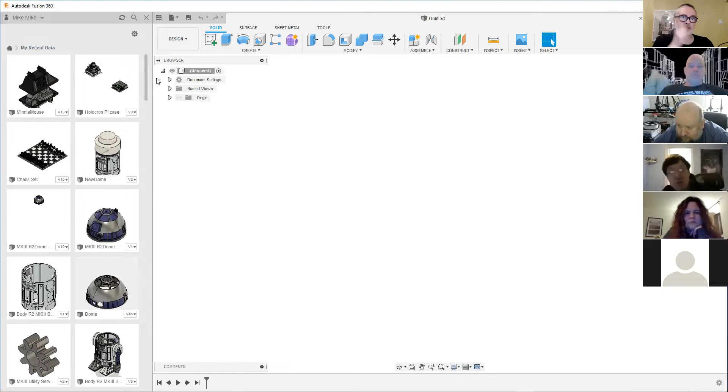And you can order this into folders. You can also back up and store your designs locally, so they're not got to be held on the cloud. I tend to back stuff up fairly regularly, obviously, with some of the intricate designs that you've got. The other great thing with Fusion is you start to build a portfolio of stuff that you've designed already. You can pretty much pick on these and go into them and edit and sort of change them.

The first thing I'll cover, and I cover this all the time, is I do what's called direct modeling. There are different statuses you can set Fusion into, and I do direct.

What I do is right click on document settings and select 'do not capture design history.' You know where the design history is, along the bottom you've got this little play symbol. I click off design history, and it tells me the timeline and all design history will be removed, and further operations will not be captured in the timeline. I hit continue and that disappears.

The reason I do that is that what Fusion does, if you leave the timeline on, is it records everything that you do. So you can go back a number of steps, change something, and then go forward. But to do that in the background, it very complicatedly links all of your objects and everything you're building. That means when you start to make changes, sometimes strange or unexpected things happen.

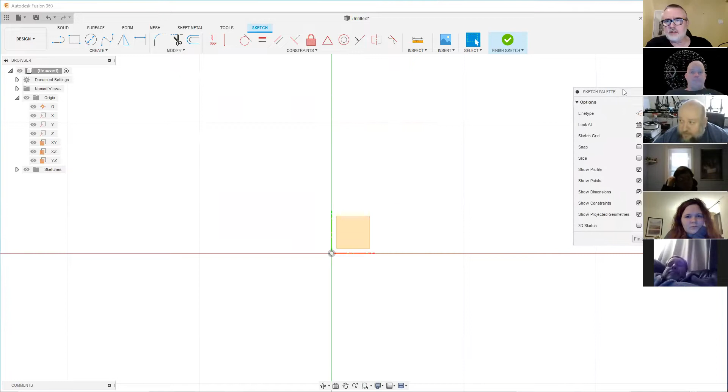What you'll see is all your tools across the top will change. You'll have a sketch palette that comes up, and your design stuff. Can you see a box called Sketch Palette? Yeah, you can. Cool, okay - just sometimes when you share windows, it doesn't give you all the windows that pop up, so I want to make sure you can see what I'm seeing.

So I'm going to go up to the solids here and click on a 2-point rectangle. What I'm going to do is drag that out, and as you can see, as I drag it, the numbers change. If you let go of your mouse, I can just type 20, tab, and type another 20, tab, press return.

What I've done is created a 20 by 20 millimeter sketch. It's a flat 2-dimensional object, so at this point it isn't actually a solid - it's what I call a sketch, and I'm still in sketch mode.

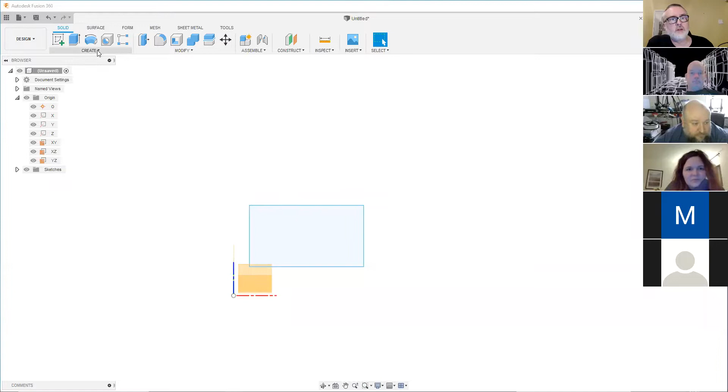So on the top menu, I can click Finish Sketch, and I'll go back into solid mode. In Fusion 360, if you drop down here, there's lots of different modes it can go into that dictate the particular mode you're in. Now I'm back into solid mode, and when you're in solid mode, this is where you create 3-dimensional objects.

So all we've got at the moment is a square we've created that's 20 by 20 millimeters. Because all of the peripheries are connected together, it's a continuous loop or continuous object. When I hover my mouse over it, you can see it changes color, which means I can select that particular square. If I click Create and Extrude, and type 20 into there and click OK, I've now created a 20 by 20 millimeter cube.

So if you then wanted to print that out on your printer, you can export that as an STL, and away you go. Now, a couple of things have happened in this browser bar on the left-hand side. You'll see that bodies have appeared and sketches have appeared, and these are two fundamental things we do with Fusion. We have sketches, which we've just drawn, and bodies, which are solid objects. If I wanted to print that, I could right-click on it and click Save as STL, then click OK, and it takes me to a browser window where I can save that as an STL file, which you can load straight into a slicer and print.

Does that make sense so far? Yeah, cool, good. Any questions at this point?

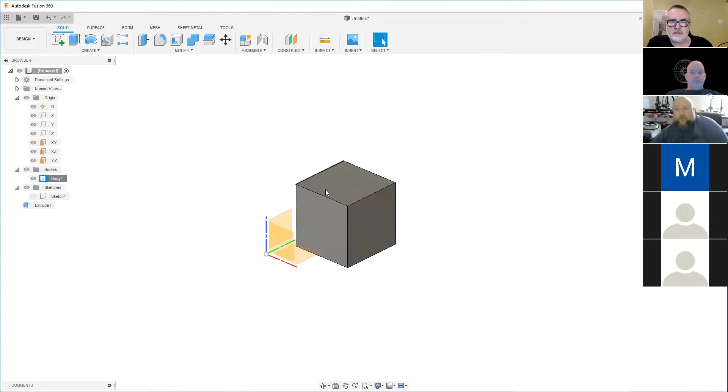How do you resize your browser window? Because it basically takes up half the screen now, and there is no drag bar or anything on it. How do I resize the browser window?

Yeah, the one on the left? Oh, this window? Yeah, as you start to create more and more complex objects and it gets longer and longer, you will have a scroll bar in there so you can go further down.

So as we start to create, let me show you what I mean, if I do something very quickly. Let's do 10... 20 of those. So now what I've done is I've got 20 objects, so you can see the browser bar's gone down, and I've got a little scroll bar at the side that lets me go up and down on there.

Delete that. Yeah, even though we've turned off the timeline, you can still use the undo and redo buttons, so it doesn't stop you undoing and going back and back. But when you save it and then reload it, it doesn't retain that undo memory.

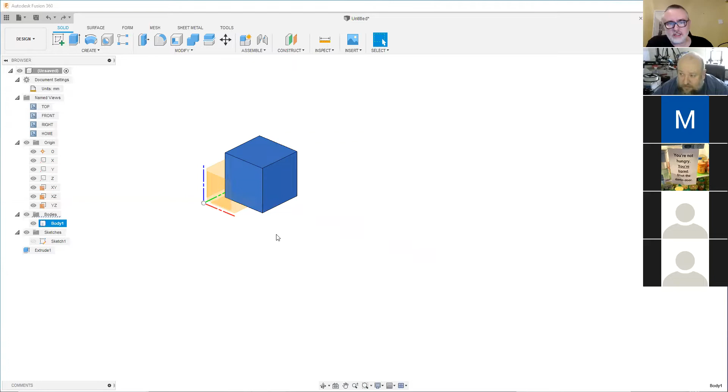Okay, so I just wanted to do that block to get the concepts of what the sketch was and what the bodies are. So sketch is 2-dimensional objects, bodies are actually the cubes. So what we'll do is I'll quickly show you how we use sketches and bodies together to do a bit more complex shapes, and what I'll do probably is we'll do a dome because that's familiar to all of us.

So if I hit the sketch button, always start with a sketch. What I'm going to start to do is select this plane here to draw a dome, and I'm just going to use a simple line command. I'm going to go from the center, and it'll all become apparent, but I'll do a 100mm high dome. And then the body of the R2, I'll make 100mm.

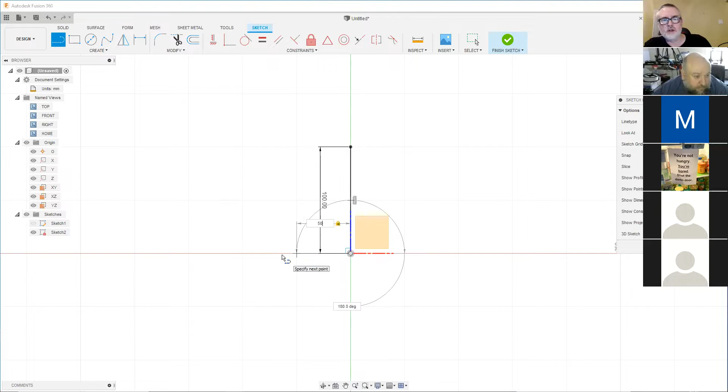So what I'm going to do is just do a line that's 50mm, and what we're actually going to do is sketch the profile of the dome, and then we're going to rotate it round to create something. Again, lots and lots of sketch tools: if we go in there, you can draw circles, triangles, arcs, splines. You've got a whole bunch of tools in there. I'm just going to quickly drag a spline.

What I'm going to do is draw a very strange shaped dome, something like that. So what I've done there is I've actually created a half profile of the dome that I'm going to create.

With all of these, you can go in and tweak some of the little points, tweak the angle of the shape you've done by dragging the dots around. If you start with Fusion 360, the best thing is to play around with some of the different tools and get a handle on how you can do sketches. Sketches are probably the most important thing. So I've created a sketch.

I'm in sketch mode as we said before, and now I'm going to click Finish Sketch. The next thing drops me into solid mode, so this is about creating bodies. Because I've got a full perimeter, it lets me select that. If I click Create, I've got a bunch of tools here - things where you can create boxes, cylinders, spheres, all sorts of things, which almost bypasses the sketch mode and just creates a solid object straight away. My preference is always to do a sketch first, and then from that create the body you want.

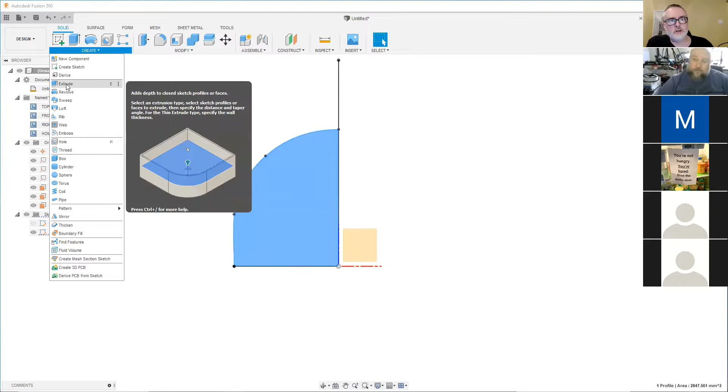So I've shown you extrude, which is how we did that 20 by 20mm block. What I'm going to show you now is something called revolve. What revolve does is take that profile we've got there and revolve it around a single line. So I'll click on revolve. It's asking which profile I want to select - I've got one selected. It's asking for the axis I want to select. I'm going to select that axis, and as soon as I've clicked on it, if I just drag that around, you can see it's created the dome. I'll click OK.

And there we go, we've got the start of a dome. That particular technique is brilliant, and it's incredibly easy to do all sorts of things. So if, for example, you wanted to do a greeble that was a power coupling rod or whatever you want to call it, you can draw yourself a straight line like that.

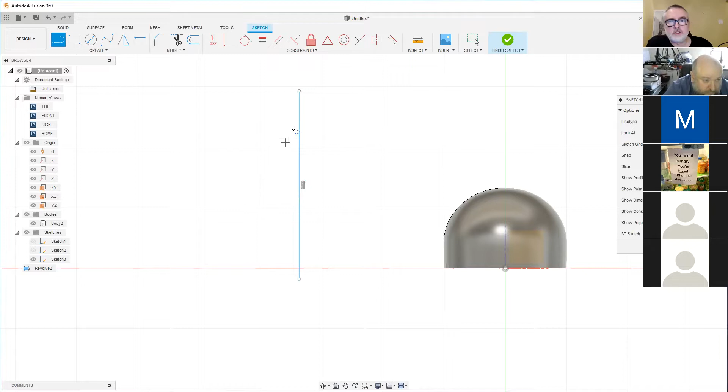Then what you can do is just draw it, play around in Bob Ross style - happy trees, draw some happy trees, exactly. There we go. Can you drop in type? You can indeed. I'll just finish this - may I interrupt for a split second?

Can you import an Illustrator vector? You can indeed, you can import DXF files, I think they are. If you click on insert, you've got SVG files and DXF files. Okay, perfect. So as you can see, what we've got there is the start of my greeble.

Then finish sketch, highlight the profile, create, revolve, hit that axis, click OK, and I've now got that.

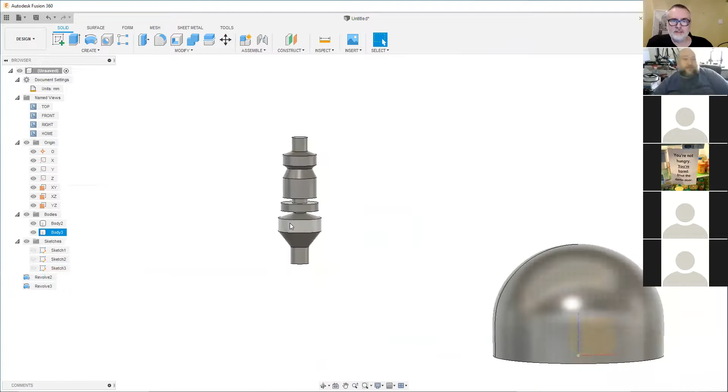Oh, that's nice, that's awesome, very cool. I'm giving all my secrets away. You'll just be able to fly off and go and do all this kind of stuff. Yeah, it's really kind of cool to do little things like that. There's loads of different tools that can do these sort of things, but you've just got to get used to the very basics first.

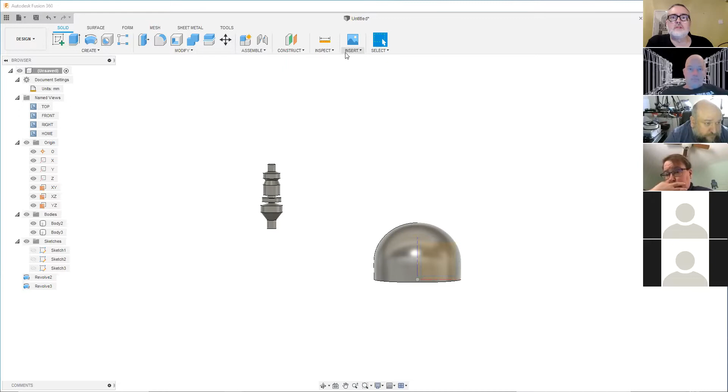What I'll show you as well is where you want to take the reference of something and start to create. Across this top there are lots of things you can do. We've covered some of the design ones, but you can insert all sorts of things. I can insert what's called a canvas. I'll click on insert canvas and it'll let me click on insert from my computer - I can browse for images.

Let's see what images we've got that we can pull in. Let's pull a chopper in like that. So I can choose an image like chopper, select a face, that image comes on, and what I've got now is a resizable backdrop picture I can use as a reference. This is actually a render of the chopper I designed, but it'll do. I can position this wherever I want and click OK.

What that's given me now is a reference point, though not necessarily the right scale. For example, the standard width of an R2D2 dome is 463 millimeters, so I don't know if this particular image is exactly the scale I want.

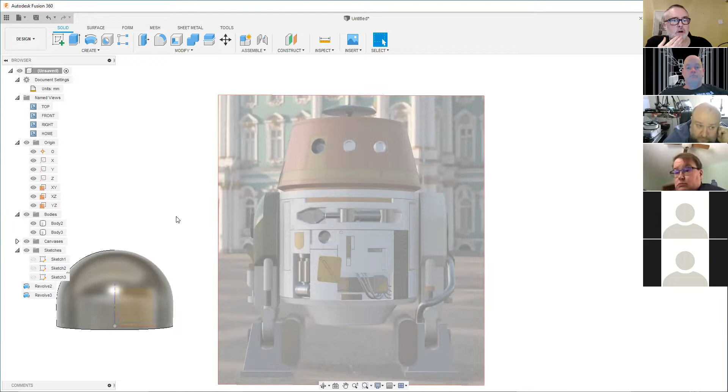Another thing you can do once you pull this in, as you can see it's flat on the axis, is go under Canvases, which is what I've just pulled in. That image is called Front. Click on that and I can edit the canvas, making it more solid or fading it so I can draw through it. I'll stick it about there.

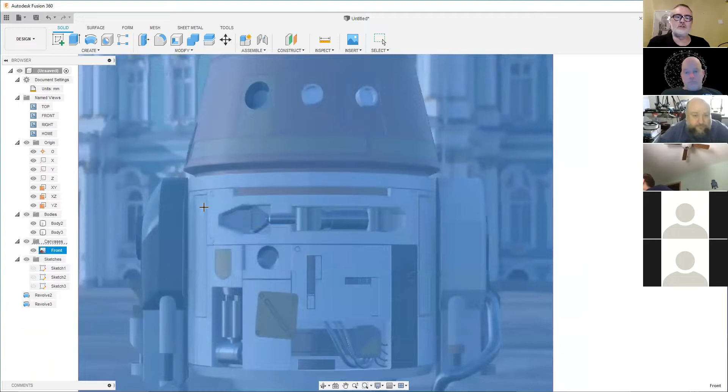Now a really useful thing on this canvas: if I right click and select Calibrate, I can resize the canvas. Remember, R2D2's dome is 463 millimeters. I can zoom right in and say from that point to that point - at the moment a little window comes up on the middle of the left-hand side showing 113 - but I want it to be 463, because that's how big R2D2 actually is.

I'm using chopper, but hey ho. Click OK, click return on that, and what it does is resize the image so that now if I draw a line from there to there, you can see that is 463 mil. So what it's actually done is sized that reference image at exactly the same scale. So if you're looking at a particular prop you want to create, first bring the image in as a reference, size it, and then you can start to draw it.

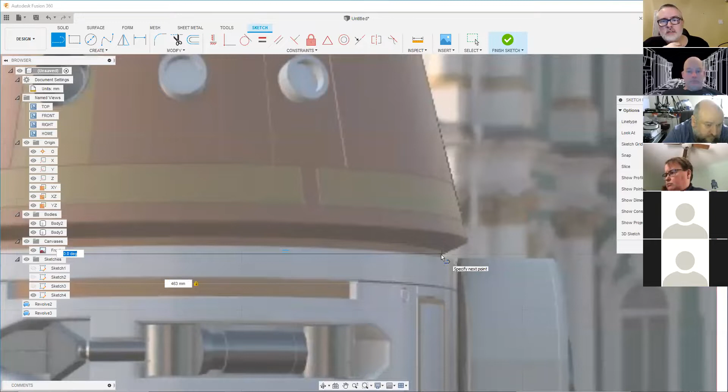And the way I draw Chopper's dome is I'd probably take a line from there to there, which is 463. There we go, done.

As I said, when I'm doing domes I'll tend to do them in profile. If I hover along that line, it'll freeze at some point with a little triangle - I don't know if you can see that on screen - but where it freezes, it's automatically found the center point of that line. So I'll do a center point straight up, click tick, and then you can just start to trace out the edges of that dome and get a perfect profile.

Now, of course, the picture we're looking at is a perspective picture and we're drawing in orthographic, meaning we're drawing flat. So you've got to take that into account when you start to build these things, but it gives you a really good point of reference.

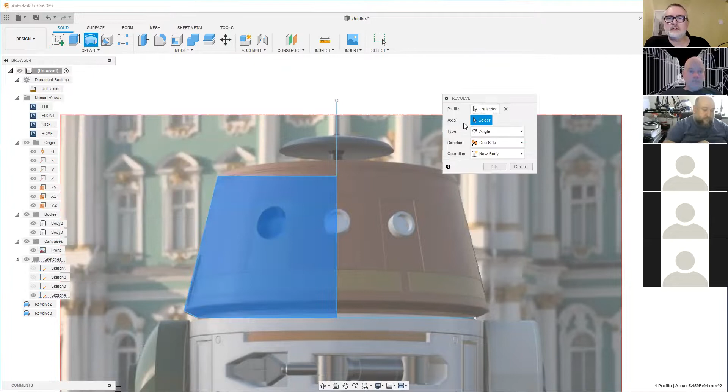So I'm going to pull that back flat to there, and what I've got is a pretty accurate profile of a chopper dome. Then exactly as before, I do Create, finish the sketch, get into solid mode, Create, Revolve - oops - Create Revolve, select that middle bit as an axis, click OK, and there we go, we've got chopper.

And if I tilt it up a little bit, you can see it starts to follow the lines of the actual image we've got. I can actually flick it from orthographic to perspective. I'll just see if we can get that near enough spot on - there we go. So you can see what you're actually doing is first sketching what you think it is, then if you turn the canvas or the bodies off and on, you can start to see how accurate you are in the way you've created it.

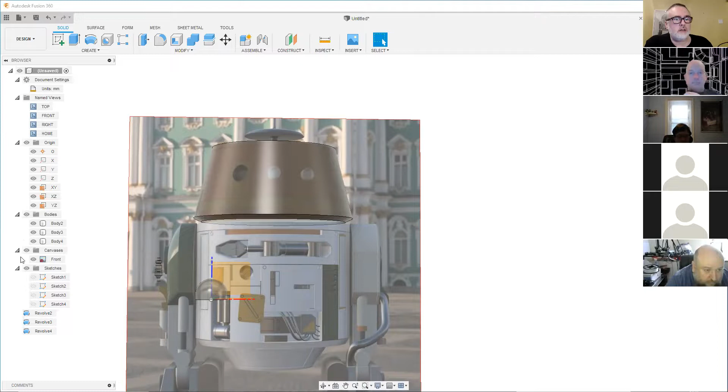So I've created a chopper dome. Let me put it back into orthographic mode just so I can see what I'm doing. I've created a chopper dome.

The next thing I'll do is hollow that out. To hollow something out, I select the face I want to hollow from, which is this bottom piece. When you're selecting faces, they have to be perfectly flat—if you're trying to hollow out a curved surface, it will be very difficult. I'm going to select that bottom one.

I'm going to click on modify, and there's something there called shell. What shell does is it lets you take a solid object and hollow it out, and I can choose how thick I want that wall to be. In this case I'm going to do 6 mil, which is typically what I use, but obviously you can use whatever you want.

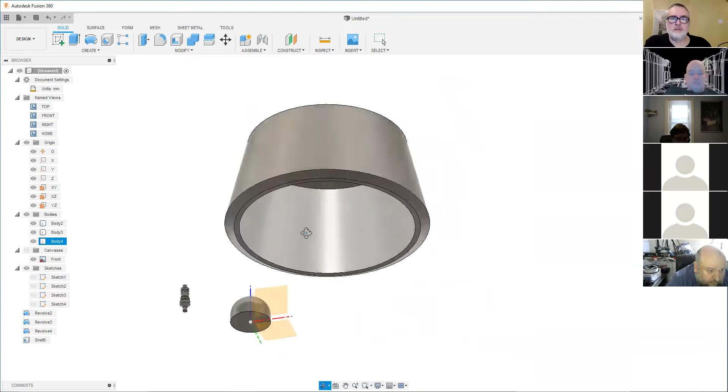Click OK, and now you've got the hollowed out dome, which is your basic shape. The way hollow works is it looks at the outer perimeter and tries to pull back by 6 millimeters. One of the gotchas is if you do loads of carving on the outside to put all the detail in, and then try to hollow it out, it'll attempt to follow all the details on the outside when hollowing, which generally means you'll get an error.

If that happens, you've got a couple of options. The cheating option that I tend to do—I'll talk you through it. So it won't allow me to hollow it out.

So what do I do? I draw a line on the bottom—just a quick line like that—and it'll all become apparent why I'm doing this. Then I'm going to cut this object in half using that line. This is a technique you'd use if, for example, you wanted to chop larger parts into smaller parts.

So I click on modify, and this time I'm going to do something called split body. What split body does is it takes the body that's there and uses a line to slice it. Select the body, there we go. Select the splitting tool, that one, click OK. And what I've got now is two halves of a body, if that makes sense.

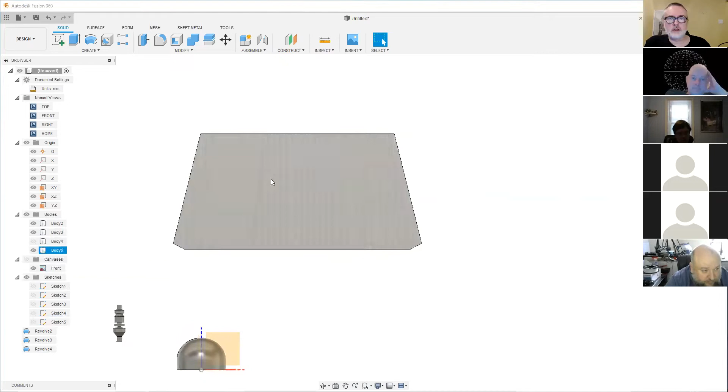Once I've got two halves, I'll move a little quicker so you'll see what I'm trying to do when hollowing it out. Now I've got a flat half that I can draw on, so I'm going to go into sketch mode and draw onto this flat half, doing exactly the same as before.

Then I'm going to use something called create project, which lets me sketch out an object that's already there. I'll sketch this as the object, and I'll show you why that's important, because I'm then going to use modify offset, which lets me take an object and start to offset it. So I've sketched the outside of that, and I'm just going to pull it back by 6 mil.

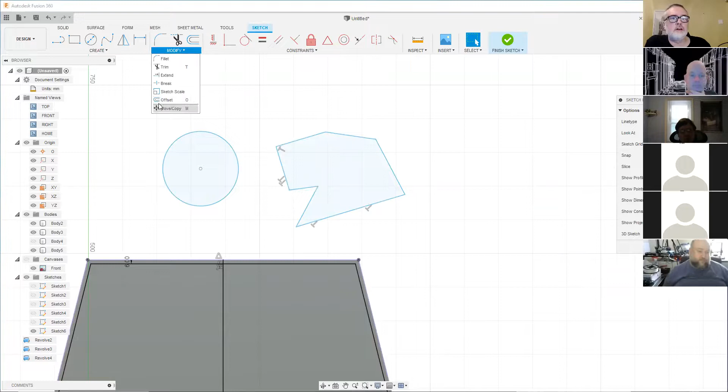And then what that's given me... So Michael asks, is that offset based on the projection? Yes—all an offset does is, if you've got any sketch, say like that, what offset does if you go modify offset and select a full circle, it lets you do a second drawing that's an offset of that sketch. If I do modify offset on this one, it'll let me do that.

My question really was, did you have to do the projection first and then put the offset on the projection? You did, because of what we'd got previously. Oh, because that's just a slice, isn't it, not the actual body. That's right, I get it. Yeah, it's the actual body, not a sketch—offset is a sketch tool. Does that make sense?

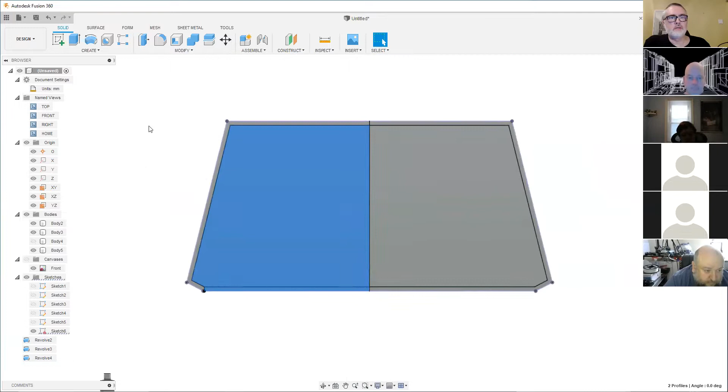So what that's given me now is that same 6mm shell, except it's sealed at the bottom. I can just draw a line like that. Then I'm going to finish the sketch, select this one, and also select this little bottom bit here. I'm going to do exactly what I did before, which is create a revolve around the axis on there. So what I've created this time is...

...kind of a chopper's shell that is 6mm in from each of the different edges. I'm going to create that as a new body. I could create it as cut, because what cut does is it combines the new body with the bodies that it can actually see. So if I bring that other body into play, what I've done here is I've created a body inside that's 6mm in from the outside of the skin, and by combining the two under cut mode, it'll remove the material that's on the inside like that.

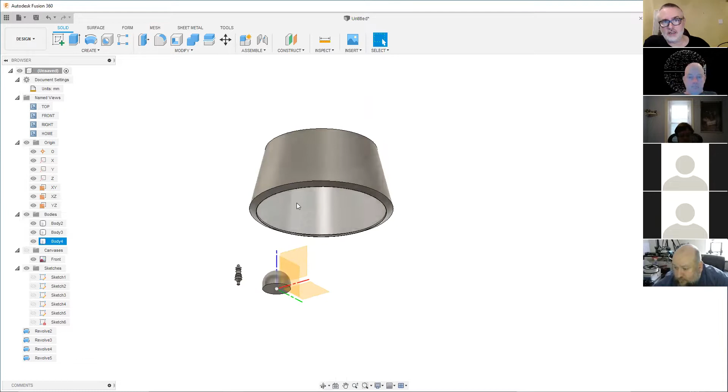That makes sense? And then all I really need to do is modify, combine, get my glue out and stick those two together again, and I'm back in that same position. So what I'm saying is you can use the shell command to make the hole, to create the shell. But if the shell command doesn't work, what you tend to do is make a body that's a little bit smaller that sits on the inside, and then you can combine cut, and it'll give you a little bit of a hollow shape.

I guess for a typical process, do you tend to try and do all your more intricate designs after you've done your hollowing out, to kind of avoid problems like this?

I do. I also very often forget, so I tend to do both. But my preference, I guess, is to hollow it out first and then start doing the modeling afterwards, because then you know that you're working with the skin.

Okay, so once you've got the basic body, that's when you can start to add more and more details. There's a few tools, and they're all quite similar. I mean, you saw how we created this little greeble here. So that's where you can start to add different layers of complexity and detail.

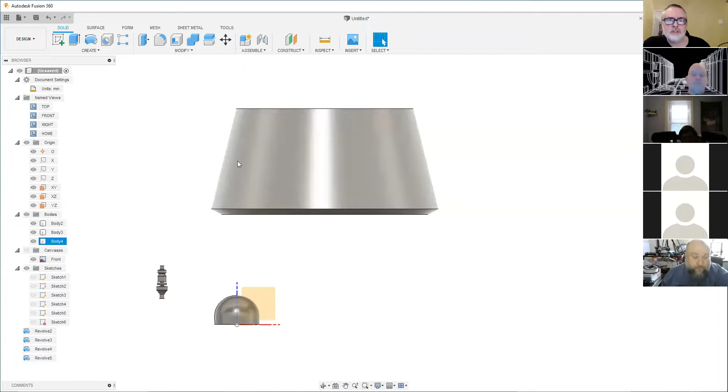There's no quick and easy way of working on curved surfaces or dome surfaces. There is a tool they've started to do now that allows you to project onto them, but it doesn't always give you accurate results, particularly for panels. So if I was starting to do panels on these, what I tend to do is end up sketching and cutting things. I'll show you what I mean by that.

So if, for example, I wanted to do some ring work on here, to create one of these as a ring, I'll just show you what I would do. First of all, I'd go into sketch mode, select this plane here, and I'm just going to draw some lines. The lines are going to be where I actually want the rings on the dome. So I'm going to draw that across there.

I'm going to move it up 1.54 mil, which is typically the thickness of things like the R2D2 lines and panels. So I'm going to do... oops, I didn't want it at an angle, delete that. There we go. So what I've done here is a little bit of a U shape, if you can see. And the reason I've done that U shape is I'm going to use it to cut this body. Again, if you think of it like wood, it's generally chopping things together and then gluing things up.

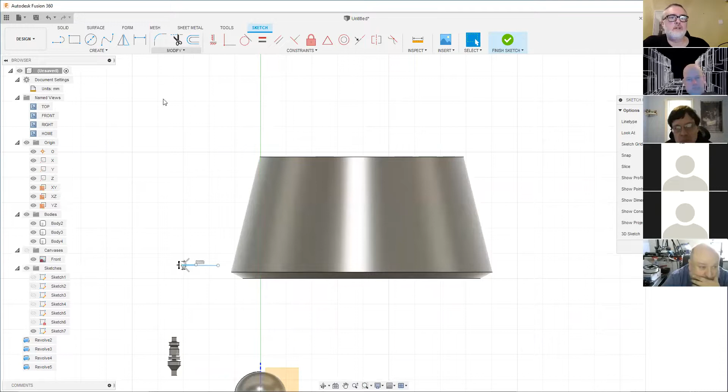So I'm going to click modify - I'm going to come out of sketch mode, sorry. I'm going to click modify, split body. And then when it asks me to split the body, it's asking me which body I want to split - this one. The tool I'm going to use is this one, the splitting tool. The reason it's got that U shape is it actually does both lines for me at once, so what it's actually going to do is cut twice.

So if I click OK, what I've actually got now is this bottom piece, this top piece, and then a very thin piece in the middle - 3 separate bodies.

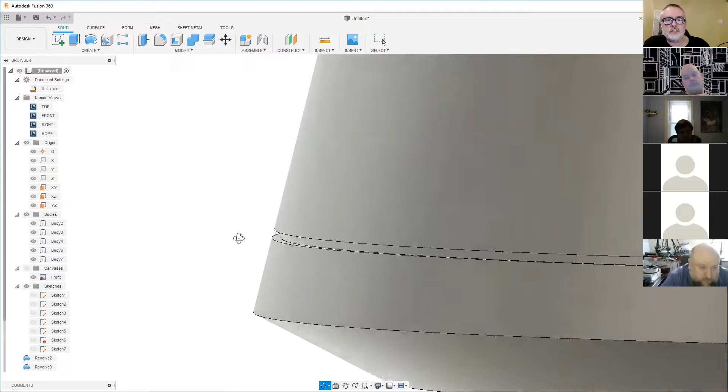But what that lets me do then is come into here, zoom in, and what I can do to create that groove that I want, if I put minus 1.54, I'm going to pull that one in a little bit. So there's a tool I use a lot called press and pull. What press and pull does, if I zoom out, is let you take a specific face and pull that particular face in and out, if that makes sense. So I'm using that to add the detail, minus 1.54. Click OK, and now I've got a slice with a panel detail in the actual dome.

And then all I need to do is modify and combine the three parts together, that part and that part. Click OK, and what I've got then is a panel on, this little ring on the bottom. The inside is still perfectly smooth because I've not moved the panels on the inside, but the outside has got this little panel mark. Does that make sense? Yes. Cool.

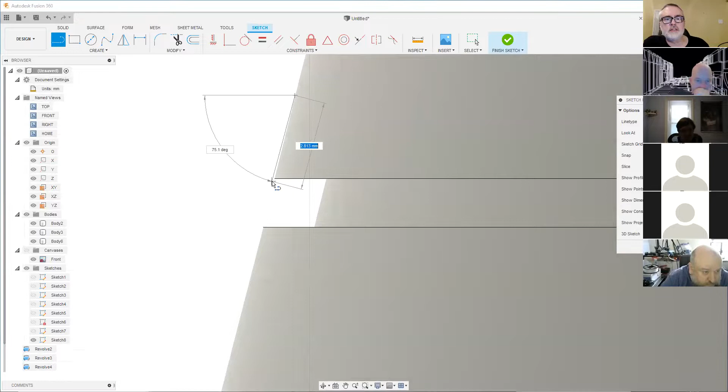Now, the challenge with this, if you're a perfectionist, is that this cut is straight across. What it probably should be like, I'll just quickly get something to show what I mean, is because the dome's at this angle here, you'd ideally want that cut at 90 degrees, if that makes sense, so you'd have a cut like that instead.

Michael, a quick question. Yep. Do you prefer to do it that way rather than putting it on the sketch when you create the initial rotational sketch? You can do it either way, Paul.

But the reason I tend to do these afterwards is it's not very often that you have a detail that goes all the way around. So with panels, like R2D2 panels, I'll use these to do the top and the bottom of the panel, and then do some vertical cuts to pull those in, so I'm not pulling in a full ring. If I was doing the base R2 rings, absolutely I would do it on the sketch, if that makes sense, Paul, but on this, it's when I start to add details.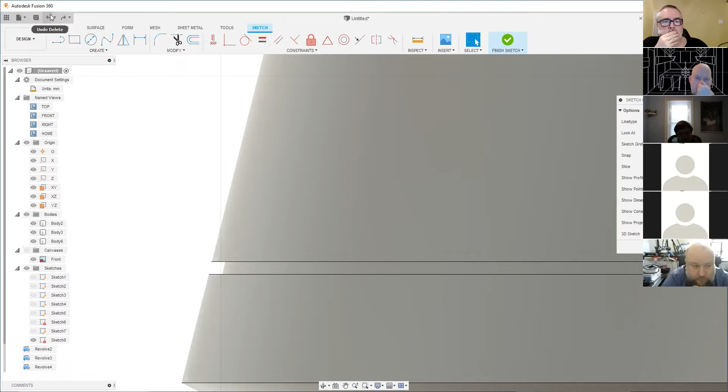I understand it's as much a personal preference and what you're used to, but I'm using FreeCAD at the moment, and I'm just trying to see how I would do that in FreeCAD. I think at the moment, with my limited knowledge, I'd have to do it with the sketch. I'll have to investigate how I might do what you've just done.

Yeah, you can. If you know exactly where everything's going to go beforehand, you can draw the lines in, out, in, out, in, out. The other disadvantage to that, Paul, is when I said before about the shell, it makes it very difficult to shell if you put all those details in the first instance, because it's trying to do a 6mm shell where you've got 1.4mm things on the inside, and shell gets a bit confused when you've got more detail on the outside. But you could also put your shell on the rotational when you do your rotational.

Yes, you can. Okay, so I just wondered if that was your preferred way of doing it, that was really my question. Yeah, it is, it is. I think I tend to work by blocking out the basic shapes and then starting to go into the different levels of detail.

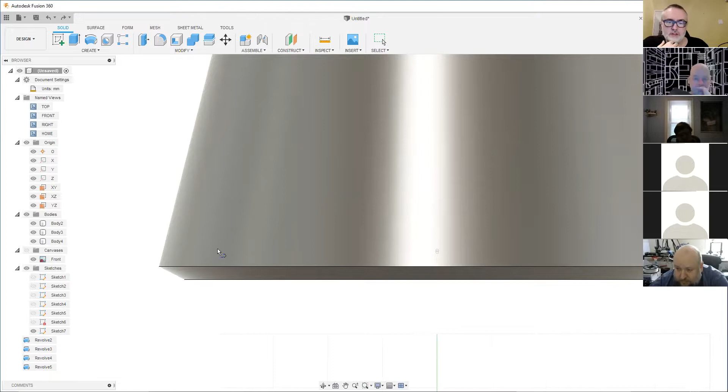I think when I'm working on very complex R2D2 domes, I prefer to do that because I get all the outlines done first, I can check the shapes are right, and then I can start to dig in and add the panels. But you're absolutely right, you can start to do that beforehand, sketching the panels in. The challenge you've got when you do that is if it's not a full ring, if it's just a groove that sits on the other side of a panel, it gets a little bit more complex.

So there's other ways of actually creating those cuts at angles, which I'll quickly touch on. I'm just going to go into line mode again, and create a project. There's 2 different uses of project, which I always find confusing.

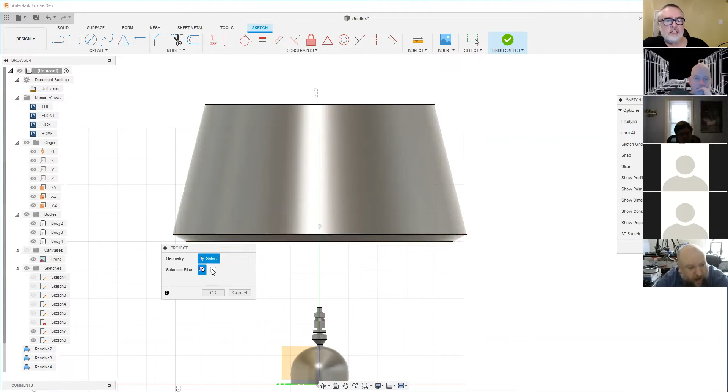There's specific entities and then there's whole bodies. When you do whole bodies, it just does the outline of what you select, irrespective of whether it's got bits going in and out. If you select entities, you'll select a panel - for example, this entity, you can see the two lines in red, the top and bottom line, and I can select this bottom panel separately. If I select the body, I'm selecting the whole thing and it'll just do that as an outline.

So as Steve said before, what I've done there is create a sketch, which you can see, that's in the same shape as the body. And if I just draw a line down the middle of that, we can work in profile. But if I want to start cutting those panels out, I can create what's like a cutting tool, which I'll show you what I mean by.

So if I draw a line from here at 90 degrees - the good thing with Fusion in sketching is once it knows the line you're coming off, it'll automatically lock to 90 degrees, so it's not all guesswork. There we go, 90 degrees. And then I'm just going to continue that line on, and if I touch this line here and go the other side, it'll continue that line. I'll show you why I'm doing this in a second.

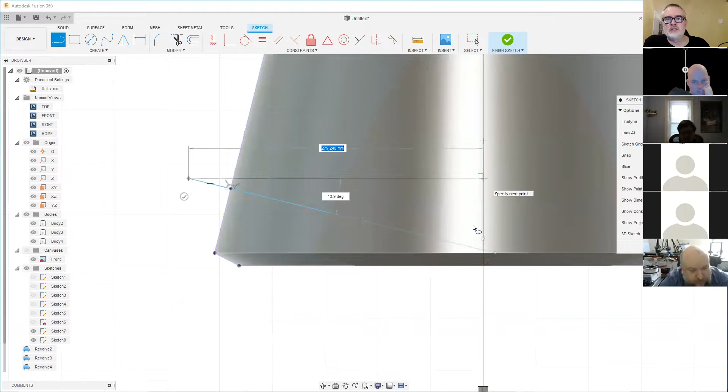So what I've created there is a triangle. And the reason I'm doing that triangle - take the bodies, exit sketch mode - is I'm just going to create a weird little tool. Create, revolve - this is exactly the same as what I did before. Flip the bodies off. So what I've got now, as you can see, is this disc, which has got the right angle.

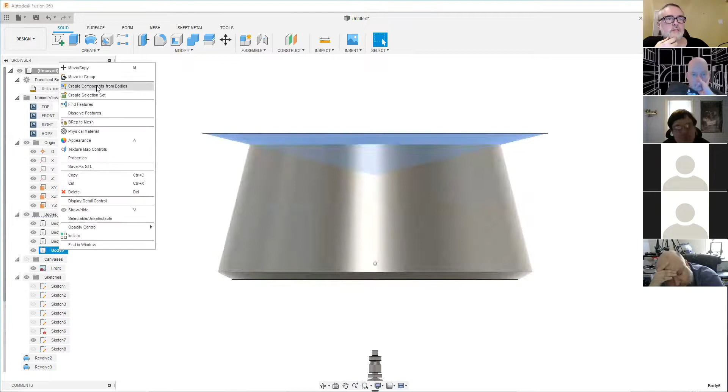Now, unfortunately, when I did that, it wasn't along the same center path as the main dome. So I'm just going to pull that in with what's called an align, pull that exactly central. There we go. So that disc is now at 90-degree angles to the main body. So what I can do, just move that down a little bit. There we go - I can use this disc as a cutting tool.

So I want to put a line there. And what I do is modify, split body, again. Instead of a line tool, I'm just going to select this very lower edge of that disc as the cutting tool, and click OK. And then what I can do - if I remove that, it's created a cut, but it's created a cut at the right angle.

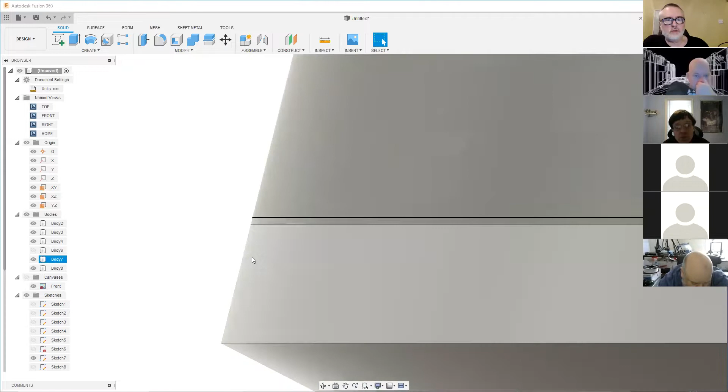So what I'm going to do is move that cutting tool up a little bit - I'll move it up 1.54 mil. There we go. And then modify, split body, highlight that piece again, select the bottom part of that cutting tool, click OK, and hide the cutting tool. So it's created similar to what we did before - a top part, a bottom part, and this part. But this part is now at the right angle for the actual dome, which means when I grab it and press-pull minus 1.54, it's done that at the right kind of angle - that's what you'd expect.

How did you create the right angle? Like, how do you know? When I pull back the sketch - the way I created the right angle is I sketched out the outline of the dome in the first instance. And then I just drew a line that was at 90 degrees to this angle. Okay, I get it now. You get it? Yeah.

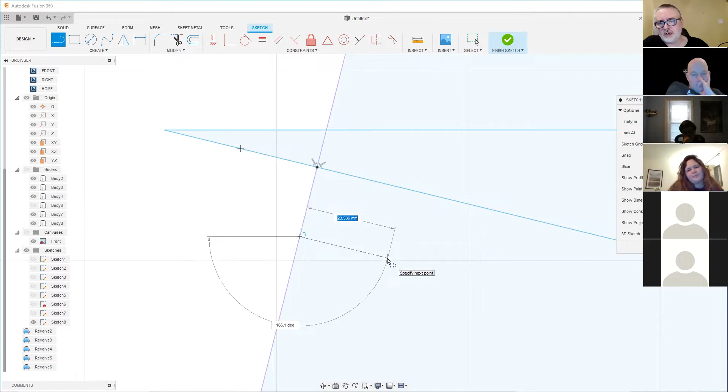So normally you can just do straight lines like that, and it works okay. The problem you've got with things like R2D2 domes is as it gets more towards the top, as it starts to curve, that just doesn't work because it looks awful. So you can actually get these at the right kind of angle - it's just a bit more of a faff having to create a cutting tool to do it. There's no easy way of putting all the details on things like domes, but you tend to get quite quick at repeating these things.

So, and instead I'll just pull that back a sec.

If I wanted to then do a panel, or not a circle all the way around, what you would then do is start to split these pieces up. I'll show you what I mean. I'm going to do it quickly, but you'll hopefully get to see what we're doing. I'm just going to move the cutting tool up a little bit to somewhere where we're going to do a panel.

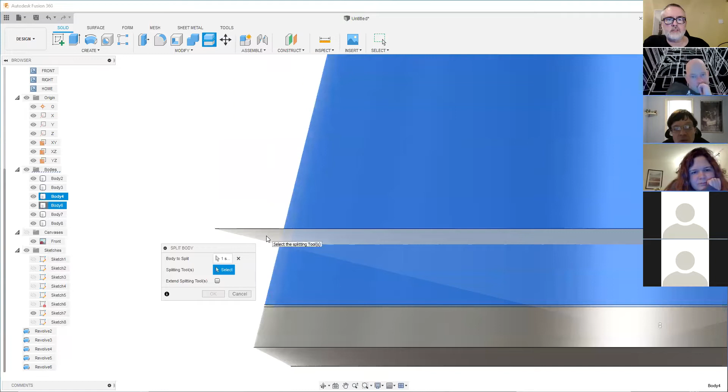Modify, split body, that top piece, and then select that inner face again. So split, make another split. I'm going to move this tool up again, another 1.54 mil, like that. And then modify split body, this top one, like that. So what I've got now is two pieces, with a bit in between.

If I wanted to do a panel, what I then start to do is some lines on top as to where I want those panels to go. I'll do it very quickly. I might want a panel that's say this big, and then I'm going to sketch, modify, split body, and this time I'm going to split this one, all three of these, like that.

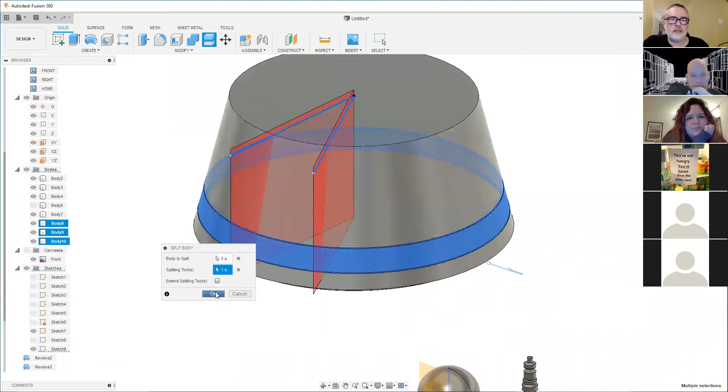I'm going to select this to cut it and this to cut it, click OK. And what that's done now is giving me, and you'll see more and more bodies are appearing, so I'm getting more and more kind of objects. So what I've done here is I've got something now that I can start to pull in.

If I was doing one panel, minus 1.54, I can pull, you can see there, but that's pulling a whole recess into that dome. If I wanted to just do a panel, what I could do then is pull that sketch back up that I had at the top.

There it is. Again, I'll just do this quite quickly. So just doing the horizontal lines, the other cut that I'll need to do this panel. Normally you would obviously measure these out, but I'm just kind of doing it roughly to show you the concept. Finish sketch.

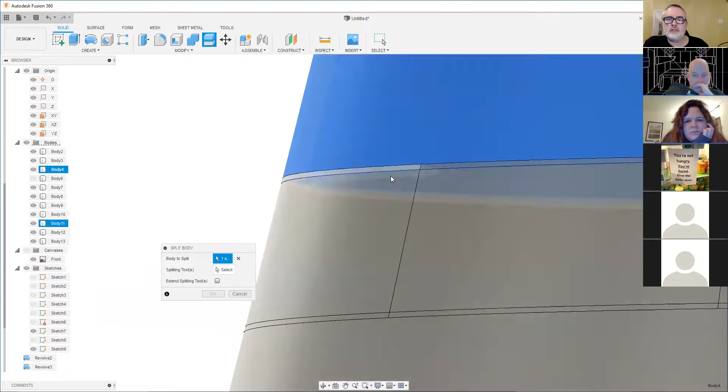There we go. And then modify split body. So I'm just going to do the outside of that panel now by splitting this body, and this body. There we go, with the outer line of that. So here's that one. Okay. And then modify split body, and I'll do the same. I'll just do that. Okay.

So what that's given us now is lots of different parts. So what I can do is select that face, that face, that face - I'm pressing the shift key to do multi-selects - that face, that face, that face, that face, that face. So what I'm doing now is just drawing around the outside of that panel. And I'm just going to pull that back, minus 1.54. Click OK. What that's done, if you can see, it's given us a recessed panel.

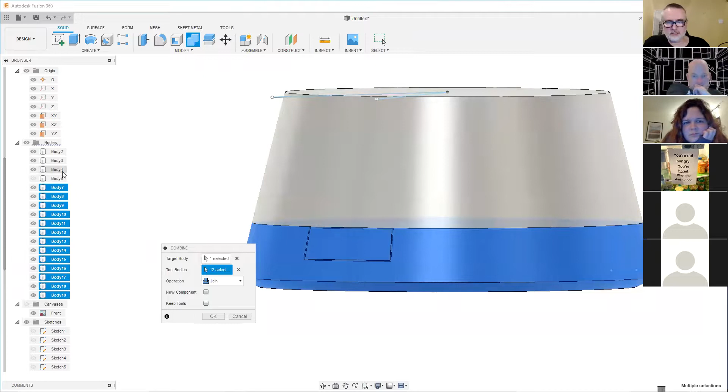And then finally, if you do modify and combine, get the glue out, and what you do then is glue all of this back together. Click OK. Once it's glued together as a single body, which this is, so that's your dome as a single body, what we've done there is created a panel on that particular dome. If that makes sense? Yeah.

Cool. Right, I know we've gone through a bit. Any questions? Yeah, how would you measure 1.54 for that, so that you've got the right measure for the recess when you create those lines at the top of the dome? On the top of the dome.

Yeah. So to do it accurately, what I would do is go into draw mode, and at the point where I can see that cut, I could click on there, click on 1.54. So I know that it should actually be about there. And that's now a reference point. And then what I would do is zoom right out again and draw a line from the center and just lock it onto that point that I've just created there. So I could do it that way.

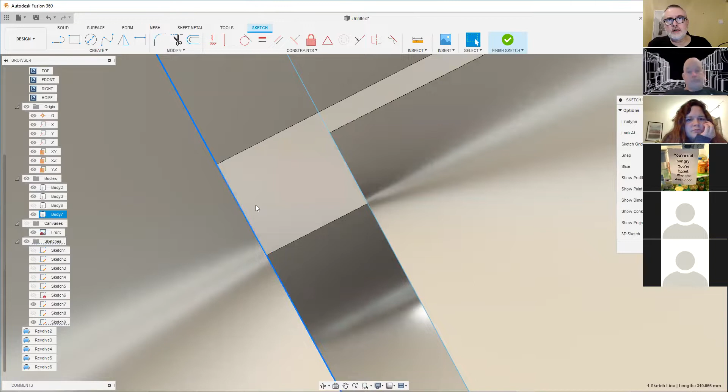The other way that you can do it, but it's not one that comes directly from the center, is I could use modify offset. I could highlight that and just do 1.54 on there. So what it's done is it's took that line as a reference line and offset it 1.54. The reason I say that's in my eyes, I probably wouldn't do that, because what it's doing is drawing the line that's not from the center then, because you've offset the whole line.

Realistically, on a printed dome, you wouldn't be able to tell a difference. But there's different ways of actually being able to do that.

Michael, do you parameterize your sketches at all, or do you just freehand them? I freehand them. What I do is I highlight all the sketches and delete them once I've used them, which is horrendous for people who do all of the parameters and blueprints. But what I find personally is the way that I work is I work the fastest by doing that, as opposed to having to do constrained sketches, ensuring all that the parameters are in there, etc. So by working in direct modeling.

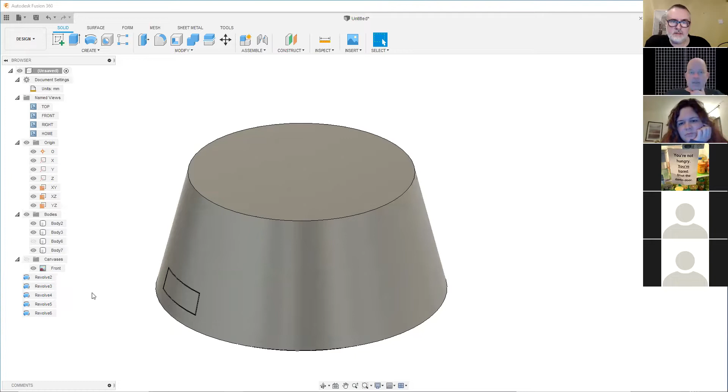So deleting the sketches doesn't affect the body? Say again, sorry. So deleting the sketches, as you've just done, has no effect on the actual bodies that needed those sketches to create them. No, not in direct modeling mode. Direct modeling mode is it's just like wood.

Yeah, because I've always used parametric with constraints and things, so that's really, I think, the major difference for what I've done in the past. It is. Oh, that's really good. And it depends what you're working on. Like I said, I would say that the way that I'm doing it is unorthodox without a doubt.

If you start to look at some of the Fusion 360 tutorials on the internet, you'll see that they build the sketches, make sure the sketches are constrained, they get all the parameters on the sketches, because what they can then do is go back and change them. What I've found is that because 3D printing, typically what I'd be doing is slicing these things up on a 500mm cut, a 200mm cut, I'd be putting joints in there. What I'd end up with is a huge amount of work every time I wanted to do that.

So working in direct mode, it's literally just like wood. And then what I do is I just save versions of the particular thing that I've done. So it's not the perfect way of doing it.

That leads me on to a related question, if that's all right, Michael. Yeah, go for it. You said about saving versions of it. Is it possible to take one of those bodies, say the dome, and put it into another sketch window? Like with the little plus sign on the top right. Can you do like a copy and paste between?

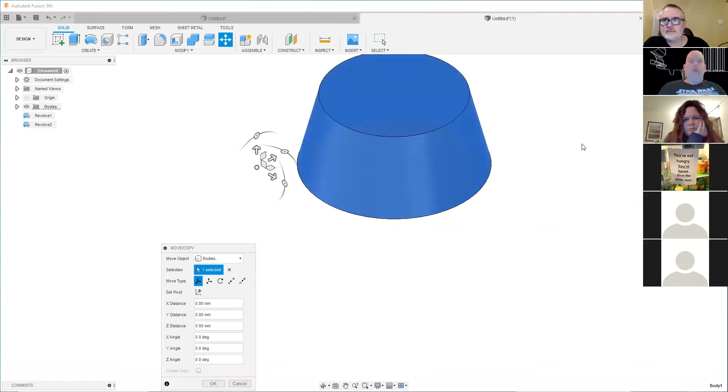If I go to that document setting, right click, do not capture design history, I'm now in direct mode. Control and V, there you go, it's there. Oh, hallelujah. You've just saved me a lot of head scratching. Thank you.

And this is the direct mode. I think I've literally just been doing that today. If you watch any of the Fusion tutorials I've done, the first thing I always say is right click on document settings and turn off capture history. There's different ways of doing it, and it's not the blueprint way of doing things. But once you do it, everything works as you'd expect it to, particularly with the stuff that we do.

Thank you, switched off. Yeah. Michael, going back to that sort of recess that you did there, since you're doing a projected recess into the dome towards the center, would the emboss function work for you okay there, or?

It would do, yeah. But the emboss, let's have a look, where are you? I don't use the emboss one, just remind me where it is. Isn't it create emboss? Yeah, you were right, the first one, create emboss. Up a little bit, right below. Oh, there we go. Yeah, there we go.

Yes, it does. The challenge with emboss, from what I remember when I was doing it, was actually getting the accuracy of it.

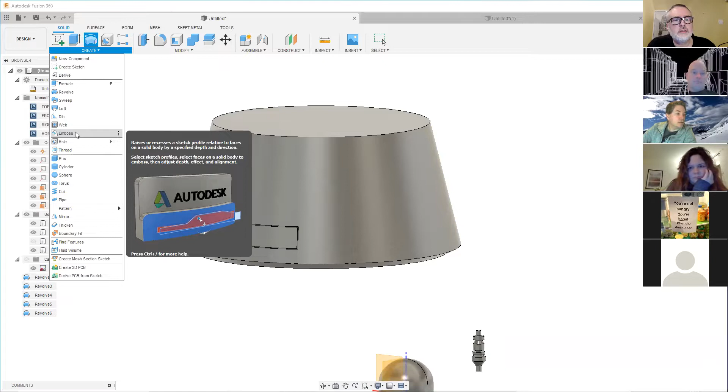On a curved surface like that, you draw something, and it will project it onto that face, and into it. So if I give you the accuracy around the ring that you want - yeah, I think there's the emboss one. There's another one they've done recently where you can draw a sketch and wrap it around a curved surface. But I have issues with both of them on accuracy. Let me just try the emboss.

So text - let's put some text in. So, hello. Oops, rubbish, can't spell hello. Let's do that at 20, make it bold. So: create, emboss, select profile, hello, select the face. Maybe it won't let you do it. Oh, there you go - sorry, I've not selected the face. There you go, click OK. So that's now embossed. That's embossed it on.

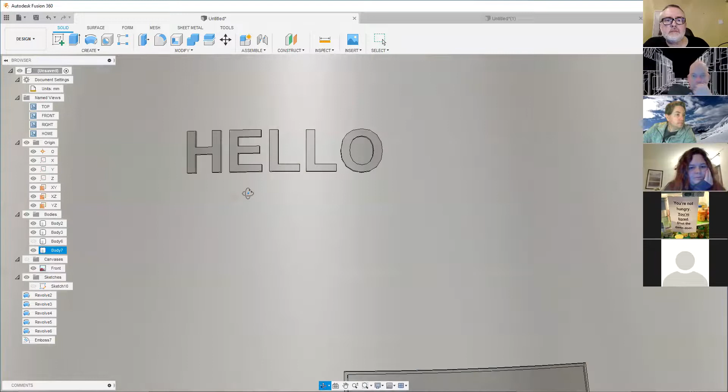The challenge with that, Trevor, is when you look at it straight on, that lower line is curved - because it did the curve to the body, on that face, right? So if I was trying to do that over a panel like that, for example...

I went on to - sorry, I've just muted it. You can unmute again. Create, emboss, that sketch profile, that face. You get that. That makes sense - sorry, you're on mute, Trevor. Yeah, that makes sense. So that's why I tend to do the choppy ones.

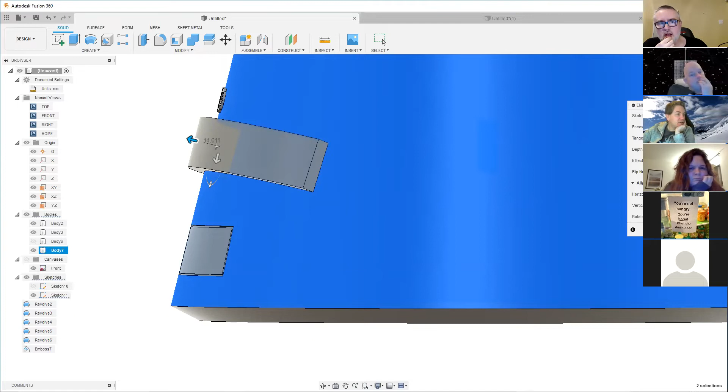There may be times when you want to use emboss. It does it 90 degrees to the plane - you get all wonky angles when that's not the way you wanted that recess to be, right? Yeah, that's right. There may be times when you do want that kind of technique, but on the stuff I'm doing, it probably has less of a use.

I'm trying to think actually whether it was emboss or whether there's a wrap as well - another command that lets you wrap a sketch around a curved surface, but again you get similar effects. So that's kind of why I don't do that.

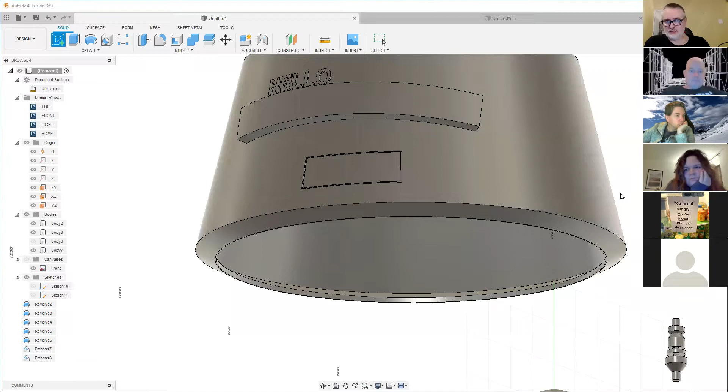The other thing then is curved surfaces and domes are always a bit of a nightmare to work on, because if I go into sketch mode, you can't select a curved surface - you can only select flat surfaces. So I can only draw on this surface or on this thin edge here; anything that's curved, I can't actually draw on. So I have to create a flat surface to draw on there. For example, if I wanted to put a circle in the middle here for an LED light, I'd have to create a flat surface to be able to do that at the right angle. That's the other area that's probably well worth pointing out.

So under construct here - we've talked a lot about sketches, we've talked about bodies. What construct lets you do is create planes that you can sketch on. These are really, really useful, particularly when you want to work in different areas.

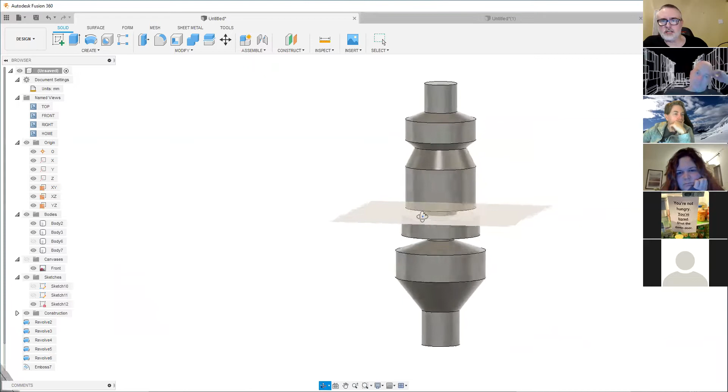A simple example: if we take this greeble that I've just created, I want to cut this directly in half. What I can do is click on construct, and there's one called midplane. If I click on midplane and select the top of that greeble and the bottom of that greeble, click OK, it'll give me a flat surface exactly in the middle of it. So if I do modify, split body, highlight that, select that, click OK - what I've then got, if you look, is it split it exactly in half.

You can also do construct offset plane. So if I wanted to do something that was 5mm, I go -5 down, and it'll give me another one that's 5mm down. I can then modify split body and use that to split. And of course, these are also planes.

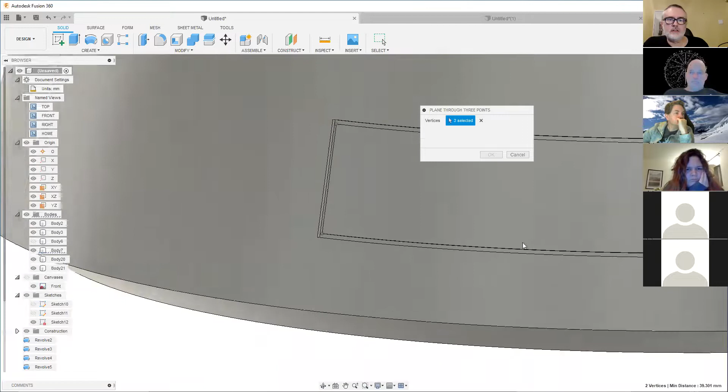If I wanted to, I could sketch on these and do things with them. Where these come into their own is when you're working on things like domes. If you go onto construct, you can create a plane across 3 points, a bit like a tripod for a camera. So give me 3 points and I'll show you a flat plane across those 3 points. If I click the point of that corner, that corner, and that corner, and click OK, it's created a plane that's just at the right angle and right place to make that hole.

So then what I do is go into sketch mode onto that particular plane. If I want a point of reference, I can click project, and using the specific entities, I can project that particular panel. So even though the bodies aren't there, that's now a sketch. With that as a reference, I can draw a line there, draw a line there, get approximately the center, hit circle, lock the circle into there. I can start to create a circle that would actually cut a perfect circle out of that panel.

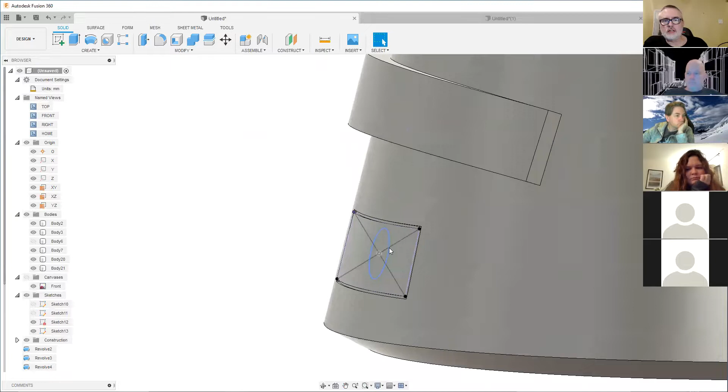Now there's tools in here. If you click on the body, another common tool is just move. It's really simple, but it lets you move stuff around, you can move objects around. It doesn't sound very exciting, but if you do that on holes, you can actually move holes around. So it doesn't just work on objects, it can work on things within the actual model. And likewise, if you've got planes, you can press and pull those planes so you can bring them in and out. Lots of tweaking you can do once you've got your basics in place.

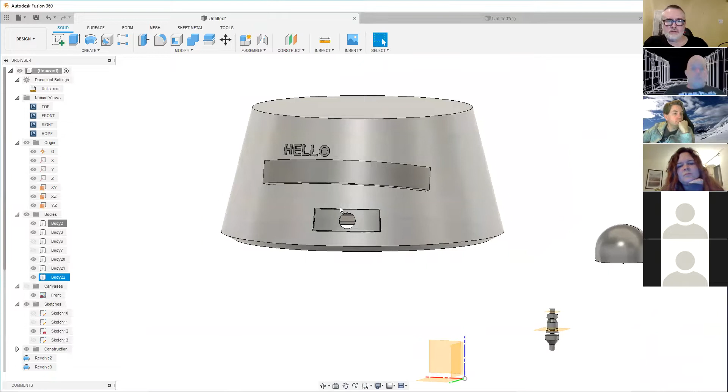That makes sense. Michael, what's your formula for usually getting real world dimensions? What do you mean by that? You mean how do you take references off movies or pictures and get accurate models? Yeah.

There's not one formula. I think what I tend to do, if you take Dio for example, I got a load of screen captures from Celebration when Dio first came out, and he rolled past R2-D2, which gave me a really good point of reference. So what I did is pull up the thing I knew was accurate, which was R2-D2, went into perspective mode, and from that you can start to guess the height and guess the width based on it. Then you pretty much compare until you get that right. It's a series of just refining it, printing it, and then going, this might be a little bit off, let me go back into the file and make the appropriate adjustments.

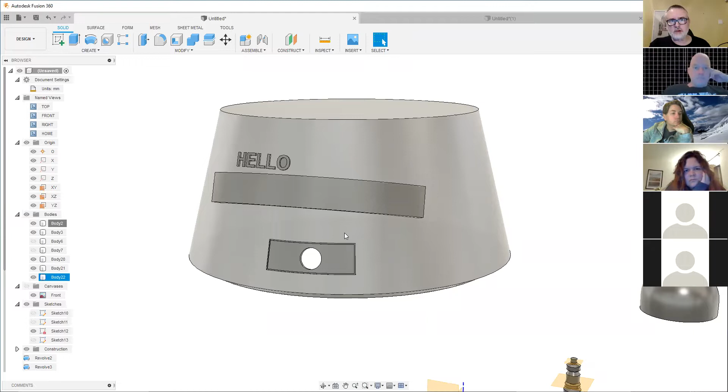Yeah, I don't tend to print it. What I tend to do is model it, and where I've pulled those canvases in, I'll start to use the canvases as reference. So I'll do a fair bit of, right, okay, I think this dome's about right, can I get it so that it fits on that. That's how you get your proportions kind of close.

But in terms of the spacing between the pie pieces, that's kind of an approximation more or less, is that a fair assumption? It depends. It completely depends on the reference you've got.

The ideal reference is blueprints and isometric drawings. So if you take R2-D2 for example, there's an amazing amount of stuff out there for R2-D2, blueprints, and the builders clubs have access to measuring the original model. So there's no guesstimation on that, it's literally just working off blueprints and putting it into the sketch. If you take something like Dio, which had no reference at all other than some images from when it rolled out on Celebration, that was a lot more of doing a sketch, comparing it to screen captures or renders, looking at it from every different angle, and then tweaking.

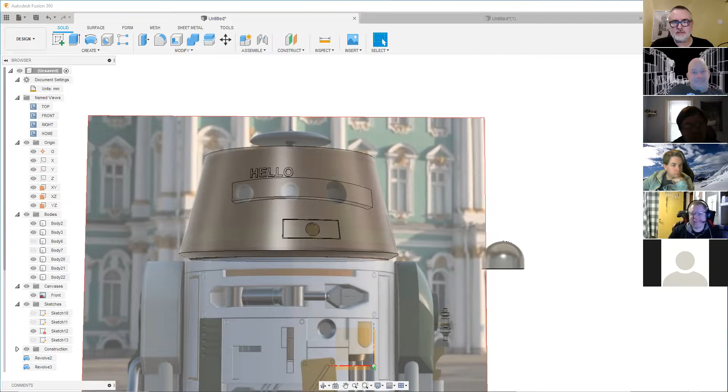Is there any challenge with Chopper in that he's digital and probably was never actually built? Yes, absolutely with Chopper - I've got the thingy one, Chopper there. So the biggest challenge with Chopper is his arms on his head physically wouldn't fit into his head - the arms that come out couldn't possibly fit into the head things as well.

But anyway, we'll jump back to this one. So that was pretty much what I wanted to cover for a first session. There's one other thing I wanted to mention, which is a little bit more advanced, but what Fusion supports is add-ins.

So you can actually get little bits of software that do custom things, and one question I get asked a fair bit is about gears. There's a little plugin called Spur Gear which you can download. It doesn't come as default, but you can download this bit of software, and what it lets you do is create custom gears. So you can choose 24 teeth, 20-degree pressure angle, and that'll give me a 304 millimeter diameter gear.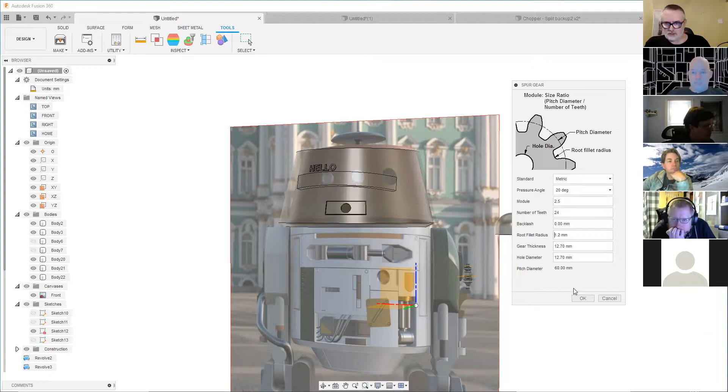So all of the gears that I'll create for the little mechanisms, I'll do through this. It lets you put parameters in, you click OK, and then it creates a gear, which I've probably lost somewhere in this design. There it is. So it automatically generates gears to start with, and then once I've got the base model, that's when I'll start to maybe cut a bigger hole in it, or model it up so it's the right shape and dimensions I want.

Cool. Okay, guys, any burning questions on Fusion?

Michael, just on that, what you were just doing on the cogs - how would you do like you've done on the R2 Dome with the teeth internal? How would you do that on that cog there now if you wanted to? I know you'll have to do another cog.

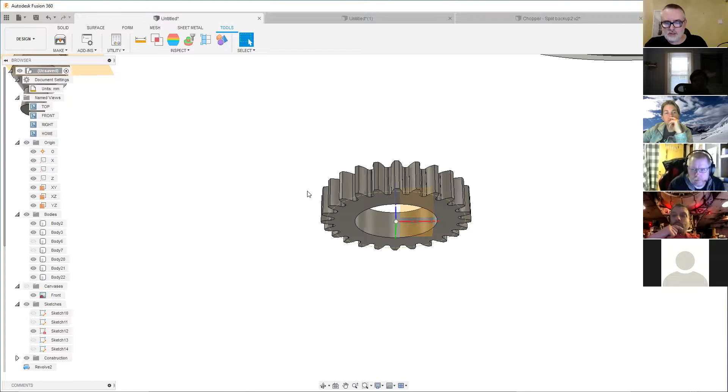Yeah, there's two ways. I found another add-on, not a utility, an add-on - I think it fails actually when it loads up - that does the inner cogs as well, Mark. So that's one way of doing it. The other way I've done on a lot of these is cutting a tooth out and creating a pattern.

In other words, what I do is you've got the outer tooth, so I'll take one of these teeth and draw a circle, and then create a pattern of teeth facing the inside, if that makes sense. So it's like manually creating a gear almost, but there is a gear generator that does it for you as well.

Have you got the Spur one, Mark? Yeah, I've got it, I put it on. I've been using it, but I just couldn't fathom out how to do the one so the teeth are the other way around.

So you could use an outer ring and then do the teeth again. Because on the droid I'm designing, I'm trying to get something to do, and it's been baffling me. That's why, hence why I've just asked you the question there.

I did. It's when I fire it up at the moment, it's giving me a plugin failure. But what I did find, this is some work I was doing for the mouse droid, but I'll just clear this up a little bit. I'll show you what that was. So the tool that I found was the one I used for the

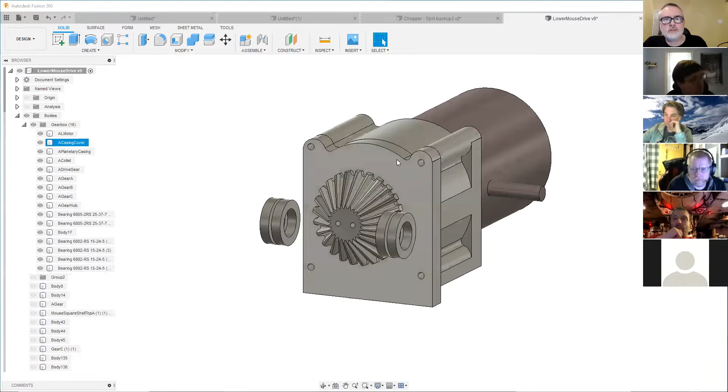planetary gearbox. So this, there we go. You can see on that one. This is the drive unit for the track droid, but I'm also using it for the mouse at the moment. I'll just pull this back.

So where we used that Spur Gear, Mark, I found something that also created a planetary gearbox. So it'll do the inner gears there, which is what you're talking about, if you can see that. It'll do the inner gears, and it'll also do your planetary gears and your center gear. Right, okay, so it's another plugin. If you go onto Fusion's website, there's literally hundreds of those plugins.

Yeah, I've got a load of plugins downloaded onto my Fusion, but as I said to you before, my laptop is not man enough to really run it. It's a bit tedious, but it's getting there slowly.

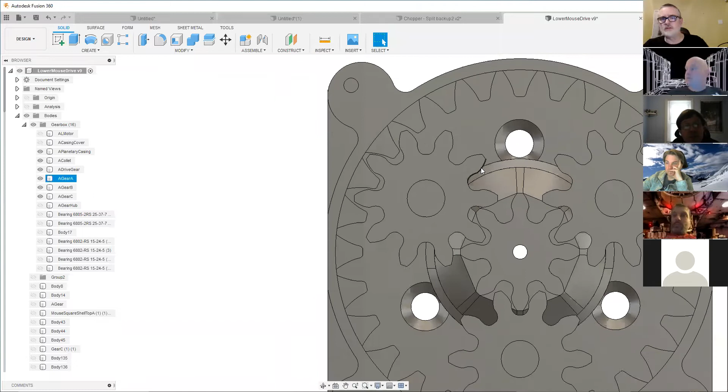Yeah, the big difference is if you chop these gears off and create one manually, you don't get this nice curved piece that you get on the ones that are generated. So the generated ones are better. As I said, I've got some tools that have generated it for doing this one as well.

So what is it you're using to model the gears for that, for the planetary gear one? Yeah, I mean, all of your gears are amazing, and you've done so many different little gears. Do you have a couple of different softwares that you use for modeling gears, or? I just use that.

The main one that I've done for all of them up to now has been that spur gear tool I've just shown, for creating the gears. But I did find a plugin that does a planetary gearbox, so I've literally just used those two. To be honest, most of them has just been using that one thing that generates the gears.

There's also, I think I posted a YouTube clip that shows how to create angled gears as well. That's basically taking a gear that's been generated, a standard gear like I've just shown how I generated it, and then using one of the tools that creates what's called a loft, where it takes a small image and a large image and generates the gaps in between. So you can create a lot of different gears off that one tool just using the standard modeling tools inside Fusion.

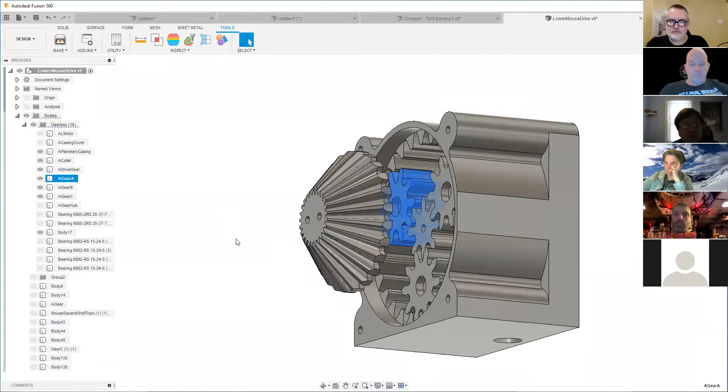I tried generating some angled gears, some bevel gears, and the results I got were that it was hard to get right. You could make something that worked, but it was very hard to get the angle to fit at 90 degrees or other angles. The gear generator just gives you something like, if you bring it in at 90 degrees this works, and anything else you're out. It didn't give you a 45 because it has so much to do with the number of teeth, it gets complicated.

That's where, if I'm doing beveled gears, I don't know what the pitch diameter is on this. I think it's 23, something like that. So what I'll do is a quick bevel gear.

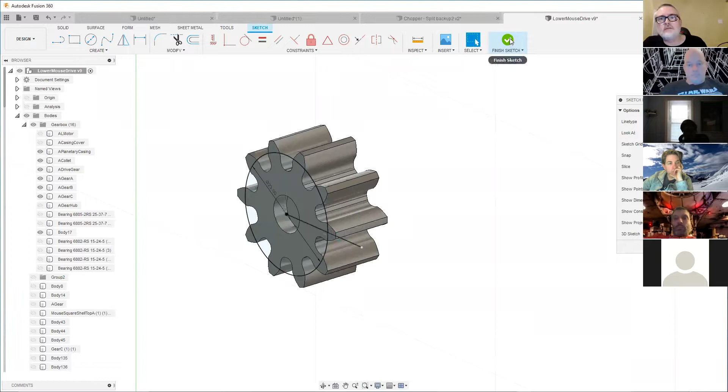What I'll tend to do is do it manually, which is I'll create a plane, finish sketch, solid, construct, place an angle like that. I can't see the planes - there we go, bear with me. Create, project. Okay, line. What was that? 23 divided by 2, like that.

I think actually what you've just done is quite a useful thing to point out to people as well, is that you can actually use mathematical calculations in your dimensions when you're drawing out sketches and things, can't you? Yes. So I put 23 divided by 2 as opposed to working it out in my head.

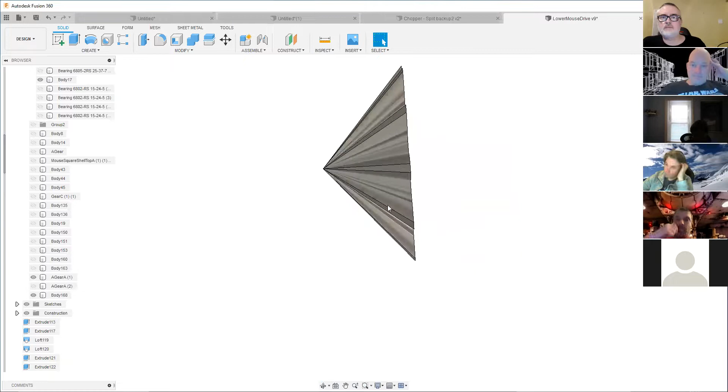Create loft. So if I create a loft of that image to that single point there, give it a bit of chance to think about it. New body, there we go. So very quickly, what I've created there is a 45-degree angle gear using the profile of the actual gear. So if I've got that one there, Control C, Control V.

It's going to try and rotate it. Look - oh, never mind, it is. Where's that done? There we go. I'm just trying to get this in place. 45 degree. So that's kind of very quickly a way of doing a beveled angle.

They're a bit out of mesh then, but I can actually move it. What I tend to do is take the basic gears. Yeah, there we go. So you see there, you've got a meshing gear then.

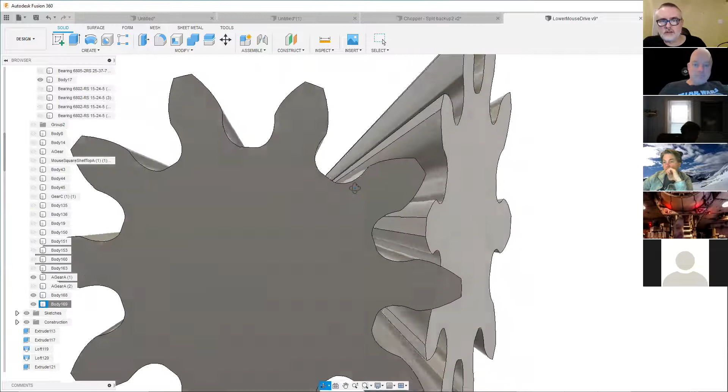That's a 45-degree angle. And then you usually cut off the top just to have a little bit more range, because the tops get kind of tight. So I'd make a parallel plane and just cut it down a little bit so it doesn't come to a point where everything gets so tight. I tend to take the edges off them as well.

I'll just tidy it up that bit, and then maybe do an offset plane against that one, so about like that. Modify, split body that, and then get rid of that there, very, very quickly. So it ends up something like that - a very rough one, but that's what I do.

That's beautiful, thank you. That helped me a lot. Yeah, there is - it's quite the way that angled gears work.

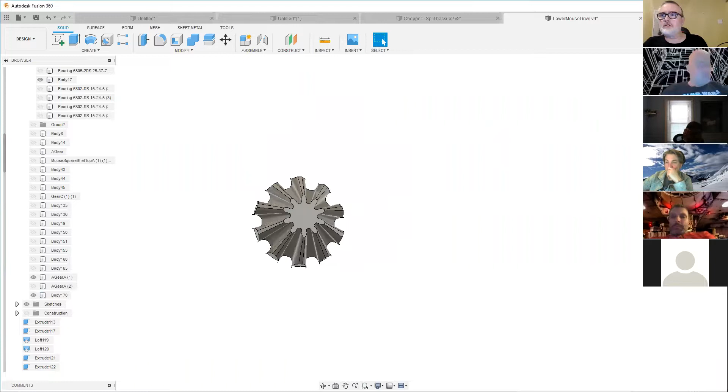Which I'll just do a very quick sketch while you're here. So the way that angled gears work is that if you've got a big gear and a small gear like that, what you're looking at is where the intersect point is of the two gears, which is at that point there. So doing a purely 90-degree angle one is quite easy, because all you're doing is pulling it out at half the distance of what the actual mesh diameter is.

When you're doing gears with different gear ratios, you've got one that's a big gear and one that's a small gear. The point you're actually lofting to, when you pull the loft out to a point, is that point. So what you'll end up with is a gear shaped like that meshing with a gear shaped like that, if that makes sense.

It gets a bit more complicated when you get into these things. You are amazing. Thank you.

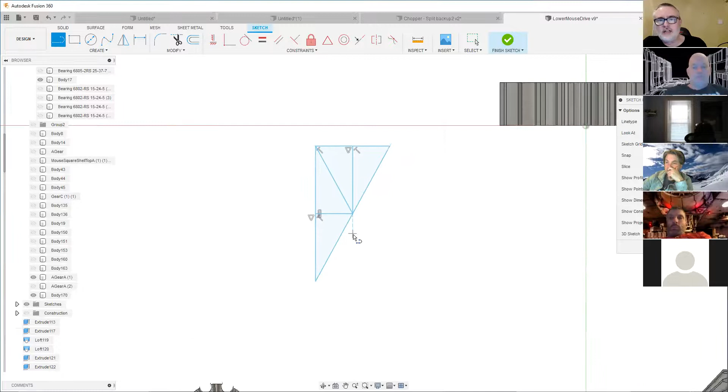Once you've got that concept, you also know that the easy way of making angle gears is just pulling a point out somewhere here, and then doing a loft to a single point. That means you can do all sorts of different gears. So if I just create a loft to that single point there, you can create whichever profile and gears you want.

Hopefully that was useful. Must remember not to save this, because this is my working mouse file. Don't save. Yeah, cool, any more questions?

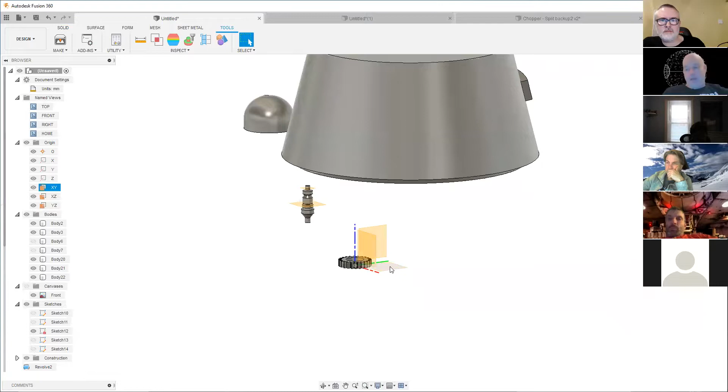I've got a very basic one, Michael, if you don't mind. When you've got a body or a sketch and you extrude it, you've got the operation type, like join if you're expanding something that already exists, but you've also got new body and new component. Why would you use either new body or new component? Can you tell me a bit about each of those two types?

Yeah, so I only ever use bodies to start with. But what components allow you to do is create mechanical subsets of what you're designing. If you get into more complex stuff, like assemblies, you can actually create joints so you can move arms and things like that. One part of the thing that moves is one component, and the other part is another component, then you joint them on a single point and they stay together. So components are ways of creating subgroups that allow you to construct quite complex mechanisms.

But if you're just doing basic separate things, you can just have bodies rather than components. Yeah, I literally just create bodies, very, very seldomly create components. The only time I create components is when I want to do complex gearing or joints, just to see how it actually functions.

Cool, any more? No? Brilliant, well thank you very much for sitting through it. Hopefully it was useful. Very. Thank you, Michael. Extremely useful. Brilliant, I'm glad. Yeah, hopefully we covered the basics. Thank you, the main thing is just to have a play around with it.

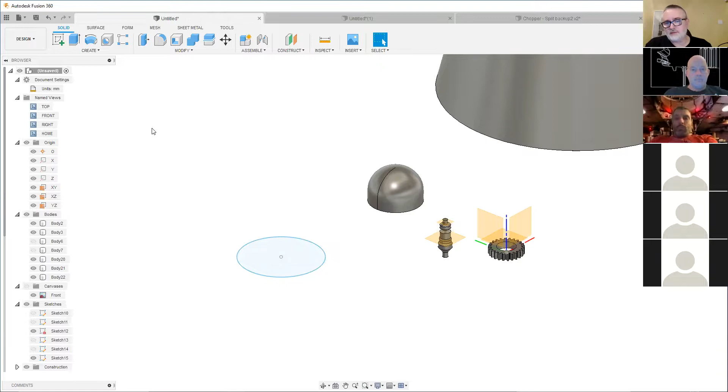Yeah, I had a chat with Gordon, he said he'd do it. Gordon obviously does it professionally as well, as part of his job, so it'd be outstanding to see him do some of the soft stuff modelling. I've done a little bit, it's more like working in clay rather than working in mechanical stuff. I think it'd be quite cool to see how that unfolds and how easy it is to do that sort of stuff.